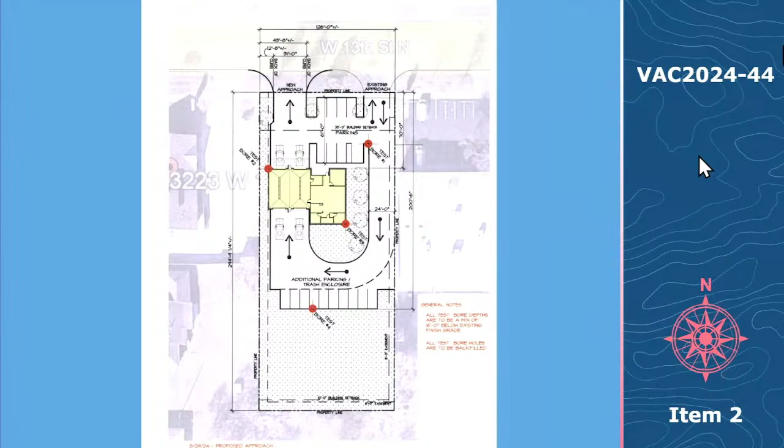I agree with the staff report, and of course, he said it a lot more eloquently than I can. Basically, what we are doing here is building an EMS post, and the additional drive that we're asking for is for egress only for the EMS vehicles that would be leaving the post for an emergency call. Thank you. Any questions to the applicant?

Agent? Thank you. Thank you. Is anyone else present wanting to speak on this item? Anybody want to speak on this item? Seeing none, I'll bring it back to commission. What's the pleasure of the board? Move to approve per staff comments.

Second. Got a motion by Mr. John William Bay, second by Mr. Aldridge. Any discussion? All in favor, say aye. Aye. Anybody opposed? 4-0. Item number 3, vacation case 2024-00045. Yes, once again, Brad Etherly, Senior Planner. Now we're discussing case vacation 2024-45.

In this case, the applicant is proposing to vacate the east 6 feet of the west 53.7 feet of the south 2.3 feet of the north 15 feet of Lot 42, Block A, Riverside 2nd Addition. If approved, this will reduce the platted setback to 12.7 feet. The property is addressed at 5505 South Emporia Avenue and is generally located within 2 blocks east of South Broadway Avenue and within 1/4 mile north of East 55th Street South.

If approved, the applicant intends to construct an egress window well. Wichita Public Works and Utilities, Wichita Fire, Wichita Traffic Engineering, and Wichita Stormwater do not object to the reduction in the setback. Neither do Cox, Evergy, or Black Hills Energy. The Riverside 2nd Addition was recorded on November 28th of 1977. Planning staff has listed the considerations associated with the request to vacate the described portion of the 15-foot platted building setback in the staff report. And with that, I can stand for any questions.

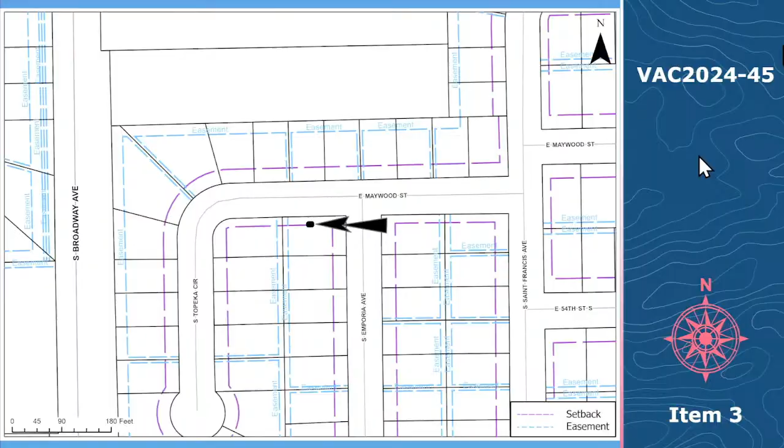Any questions of staff? Thank you. Applicant or agent? No, wait. How about advisory board members? Any comments? Rondi with Evergy, no additional comment. Getting ahead of myself. Applicant or agent?

My name is Les Munn, owner of 5505 South Emporia. I just want a bigger bedroom in the basement. And so I'm learning a whole lot of stuff about this today. And that's it. I just want to make sure I can get out of the basement. And that's basically it. So I can have a bigger bedroom. You agree with staff comments? Yes. Thank you. Any questions of the applicant?

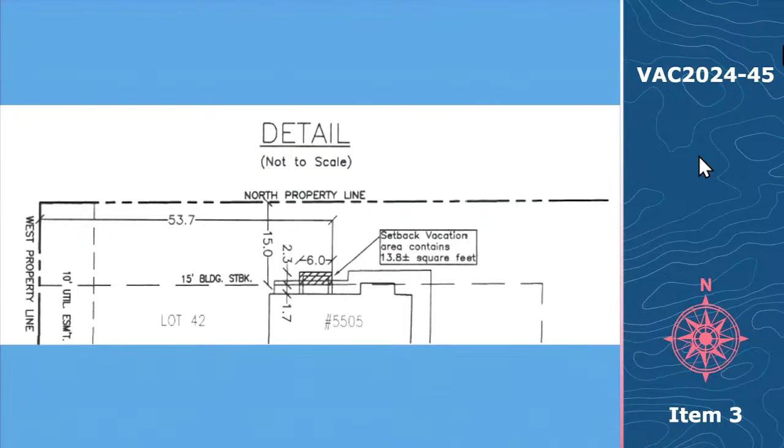Thank you, sir. Anybody else here would like to speak on this item? Seeing none, I'll bring it back to commission. What's the pleasure of the board? Motion to approve. Second. Got a motion and a second. Any discussion? All in favor, say aye. Aye. Anybody opposed? 4-0. Next case is vacation 2024-00047. Yes, once again, Brad Etherly, Senior Planner.

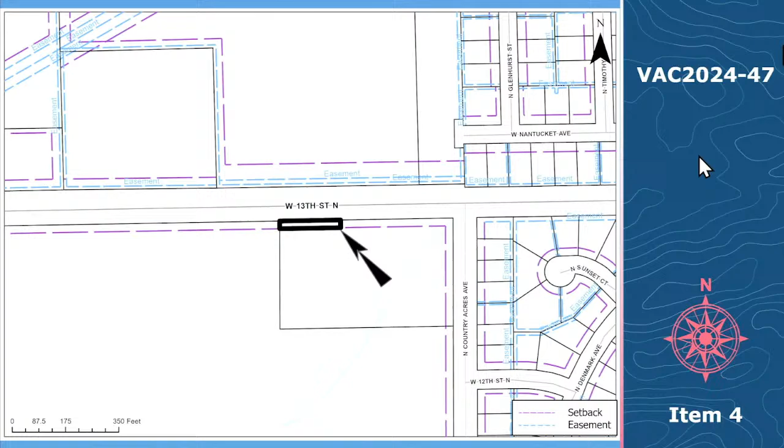We are moving on to case vacation 2024-00047. For this application, the applicant is requesting a vacation of a portion of platted complete access control to permit one drive onto West 13th Street North from a newly formed parcel split from Lot 1 Northwest High School Addition. The purpose of this new drive approach is to provide access to the proposed new Patrol West substation for the Wichita Police Department. The proposed drive would be limited to the western 200 feet of the parcel.

A zone change from SF5 to PUD, which is case PUD 2024-00017, to permit the proposed new police substation is being heard concurrently with this vacation request. An additional access point to the site is proposed to be off of North Country Acres Avenue, providing access to the proposed rear parking area of the police substation. The Northwest High School Addition plat restricts access to two openings along West 13th Street North. Northwest High School has two existing access points along West 13th Street North, which would not permit any additional drives along this section of West 13th Street North.

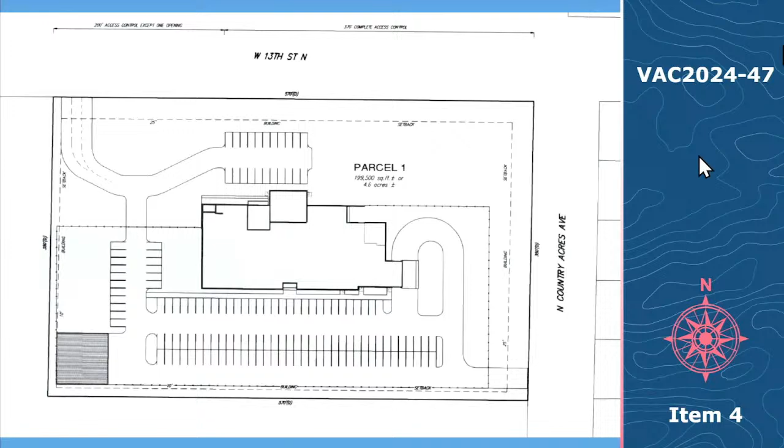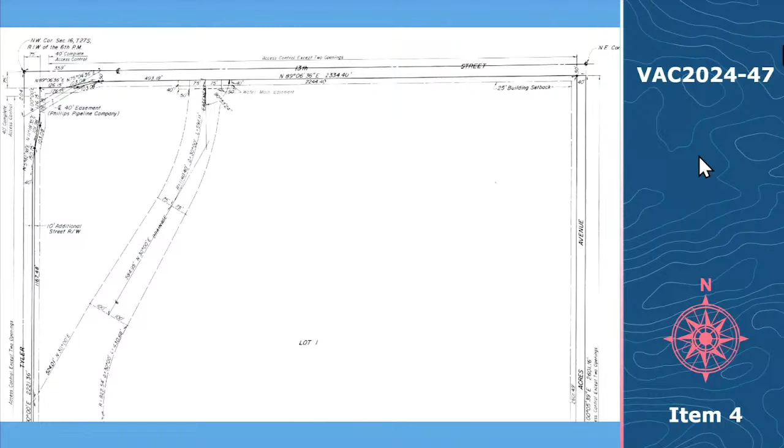The proposed new drive does not meet the City of Wichita's access management standards for driveways onto arterial streets. City access management standards require a minimum of 400 feet between full movement drives. The entire western 200 feet of this vacation area is within 340 feet of the center line of the nearest access drive. Therefore, any drive within the vacation area will not be 400 feet from that center line of any existing drive. However, the entire vacation area is over 400 feet from the center line of North Country Acres Avenue to the east, which does meet that access management standard.

There are no driveways across West 13th Street North at this location with which the proposed drive would be in conflict. Wichita Traffic and Engineering does not object to this request. Neither do Wichita Public Works and Utilities, as well as Cox and Evergy. Black Hills Energy does have a 2-inch line in the vacation area, but they do not object to the request. Any relocation of existing lines will need to be discussed and will be at the applicant's expense. The Northwest High School Addition was recorded April 14th of 77, and planning staff has listed considerations associated with the request to vacate the described portion of the platted complete access control in the staff report. And with that, I can stand for any questions.

Any questions of staff? Advisory board members, any comments? Rondi with Evergy, no additional comment. Applicant or agent?

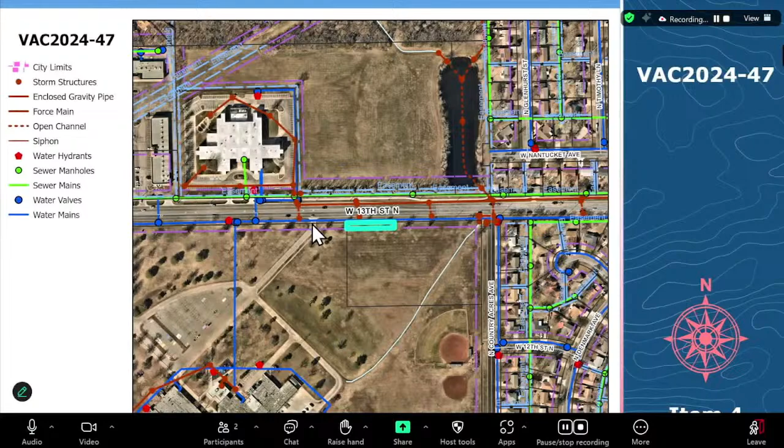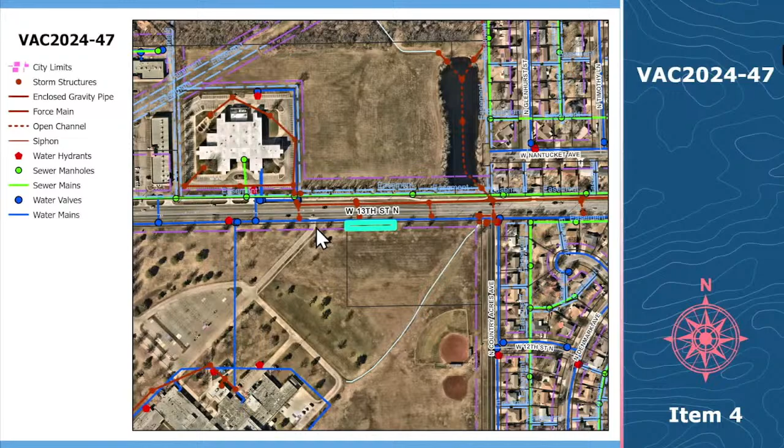Jay Cook, Baughman Company, agent on behalf of the applicant, 315 South Ellis. If you'll go back to that last slide. We're requesting this to allow for an entrance into the West Patrol that will be built. We're working with the city on this. And in that last slide, this entrance that's close is an exit only from the school, so we don't feel that that's got the same weight of a full left-right. It's an exit only instead of an exit and entrance. And if you have any questions, I'll take them.

Any questions of the agent? Seeing none, thank you. Anyone else here to speak on this item? Bring it back to board. What's the pleasure of the board? Motion to approve per staff comments and recommendations. Second. Got a motion to approve, second. Any discussion? All in favor, say aye. Aye. Anybody opposed? I'd like all these access controls lifted, but I guess that's for the city and the county.

Number 5, vacation case 2024-00048. Yes, once again, Brad Etherly, MAPD. Now we're moving on to vacation 2024-00048. The applicant is requesting the vacation of the plattor's text to amend the ownership and maintenance of Reserves A and B, Summit Crossing Second Addition. The subject site is located on the west side of North 127th Street East and within 1/4 mile south of East 21st Street North.

Reserve A is a stormwater detention pond located west of Lot 1, Block B in the subject addition. Reserve B is located on the north side of East Shady Brook Street between the right-of-way and Lot 1, Block A of the subject addition. If approved, the ownership and maintenance of Reserve A would transfer from the Lot Owners Association to the owner of Lot 1, Block B, and the ownership and maintenance of Reserve B would transfer from the Lot Owners Association to the owner of Lot 1, Block A.

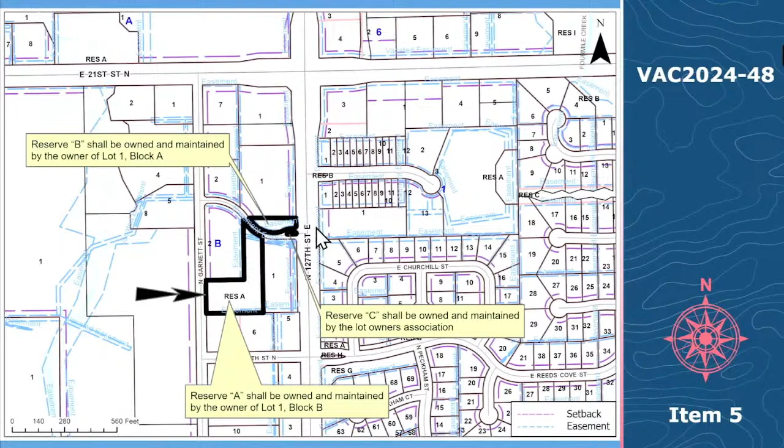The Summit Crossing Second Addition was recorded August 1st of 2017. Planning staff has listed considerations associated with the request to vacate the plattor's text of platted reserves in the staff report. And with that, I can stand for any questions. Any questions of staff? Seeing none, thank you. Mr. Advisory Chairman, board members, any comments? Rondi with Evergy, no additional comment.

Mr. Chairman? Yes. We did have a question for Brad. Is ownership and maintenance going to be transferred from A to A? If you look down in, let's see, where you're describing the considerations under number 1, it says Reserve A from the Lot Owners Association to the owner of Lot 1, Block B. Is it going to go?

Abby, that might have just been a typo. Is that just a typo? Okay, we just wanted to make sure. We can review the consideration and make any necessary amendment to it prior to MAPC to make sure that that condition matches what the ownership should be. Sorry, Brad is pinch hitting for me and reviewing these. I just wanted to make sure it was correct for the record, that's all. Thank you. Sorry I didn't see your hand. Any other comments from advisory board members? Applicant or agent?

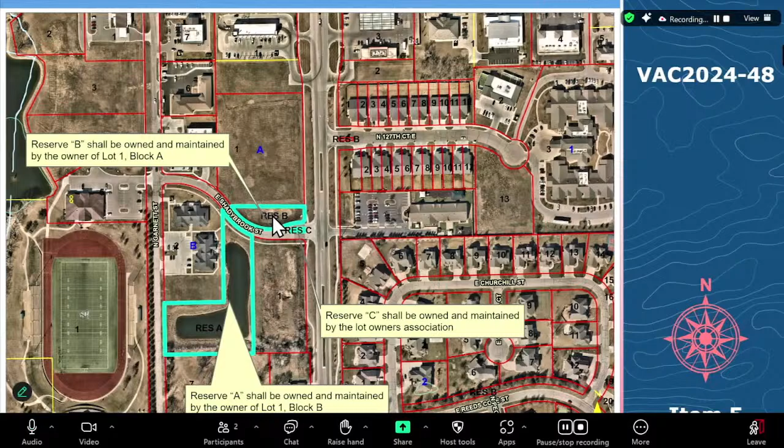Jay Cook again, Baughman Company, agent on behalf of the applicant, 315 South Ellis. If you go back to that last slide, maybe I can clear up the answer. The owner of Lot 1, Block A owns Reserve B. So that ownership goes with that, and this ownership is tied in with this lot right here. So all we're wanting to do is to change the plattor's text to put the onus of maintenance onto these. And as Brad eloquently put, the reserves will stay the same. It's just the ownership and who's maintaining that land. So if you have any questions, I'd be happy to answer.

Mr. Aldridge? Yes, sir. Okay, just to clarify, you're representing both applicants? Yes. And both applicants are good with this? Yes. Okay, thank you. Any other questions of the agent? Thank you. Anybody else present wanting to speak on this item? Anybody else? Bring it back to commission. What's the pleasure of the board?

Motion to approve per staff recommendations and comments. Second. Got a motion to approve and second. Any discussion? All in favor, say aye. Anybody opposed? 4-0. Next item is item number 6, vacation case 2024-00049. Yes, once again, Brad Etherly, MAPD.

This case is for vacation 2024-00049. In this request, the applicant proposes to vacate a portion of the platted 30-foot street side setback along West Davis Drive on lots 3, 4, and 5 of Block A, Walker Davis Addition. If approved, this will reduce the platted setback to 10 feet.

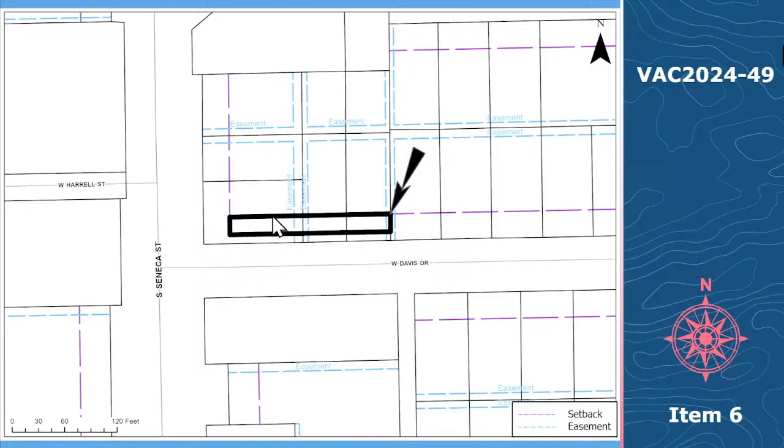The property is addressed 4720 South Seneca Street and is generally located on the east side of South Seneca Street and 1 block north of West 47th Street South. The purpose of this vacation is to create room for a receiving dock, a trash enclosure, and an overhead canopy toward the rear east side of the building. Concurrently, the applicant has a zone change application being considered to rezone the property from LC to PUD.

The applicant is proposing to repurpose the existing commercial structure into an inventory processing center for Goodwill retail locations elsewhere. Inventory would be received at this location, packaged and processed, and then shipped to those Goodwill retail locations. This proposed use creates the need for a receiving dock to be constructed on the south side of the building. Vacation request is required because rezoning a property to PUD cannot reduce platted setbacks.

If the subject setback was not platted, the zoning street side setback in the LC district would be 10 feet. The requested reduction matches this zoning street side setback. The LC zoned property directly south of the subject site on the south side of West Davis Drive was platted in the same addition, but was not platted with the street side setback along West Davis Drive. The property owner of said property would be allowed to construct a building 10 feet from the property line that

abuts West Davis Drive. Wichita Public Works and Utilities, Wichita Fire, Wichita Traffic Engineering, and Wichita Stormwater do not object to the reduction in setback. Neither do Cox, Evergy, and Black Hills Energy. Although Evergy and Cox have overhead lines on poles along the east side of Lot 5 that cross the subject setback, so the applicant should contact Evergy regarding clearance standards from the overhead lines and what they intend to construct at that time. The Walker Davis Addition was recorded on January 23rd, 1952.

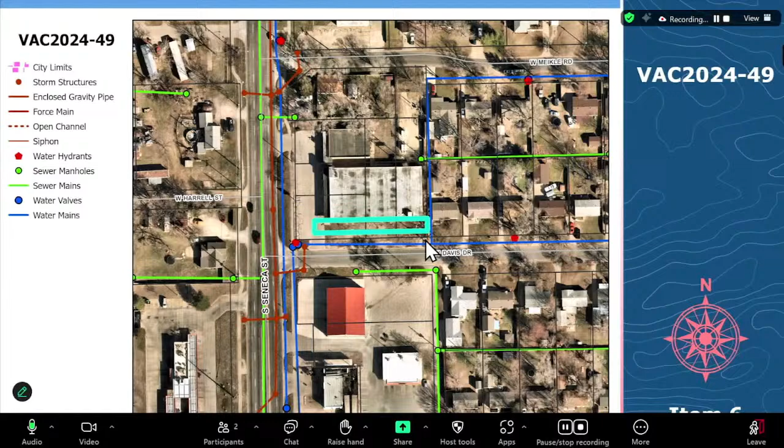It would be coming off the pole that's right there at the southeast corner of the property line. Located in the street right of way? The pole should be, yes. Okay, we'll have to check for that. And then there are utility lines that do run north through the easement along the side of the building.

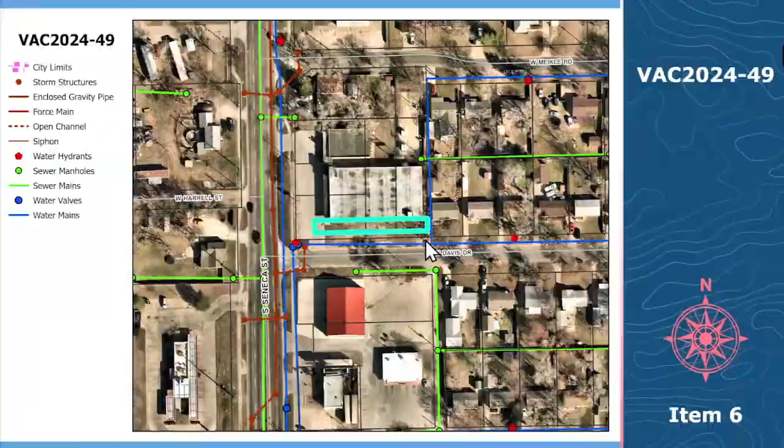Is there not a line that comes across the street? Because when I looked at Google Earth, it looked like there was a line that runs across the street from that pole. I'm looking at Google Earth right now. It looks like there's a line that crosses the street as well. But it does not cross the setback? There is a line that does run west from that pole as well. It's hard to tell if it crosses the setback or not, just from the angle of the street view.

The lines on that pole, Philip, looking at that, can you verify, don't they run east and west and then one going to the south, but nothing to the north towards the building? No, there are lines that go north towards the building. Okay. Yeah. There's one line that goes south, and then there's one line that runs diagonal from the pole in question to the southwest to a pole at the southeast corner of Seneca and Davis.

So what we can do is ensure that we're clearing arc distances on the new canopy that's being built. I believe the existing building is not tall enough that you've got an arc distance safety issue with your current poles, but we can certainly check that and coordinate with you. Okay, you just need to check with Sammy and make sure that it meets proper clearance, as well as that we have room to maintain those lines to get a bucket in there for maintenance. So, you know, we need to maintain a line that fails. Okay.

So, I have a quick question. Yes, sir. Either for you or for Evergy. So right now, the only utilities that you have in there are overhead. There's nothing underground. There's no J boxes in there. Everything over there is overhead. It's overhead area. Okay, thank you. At least that affects that.

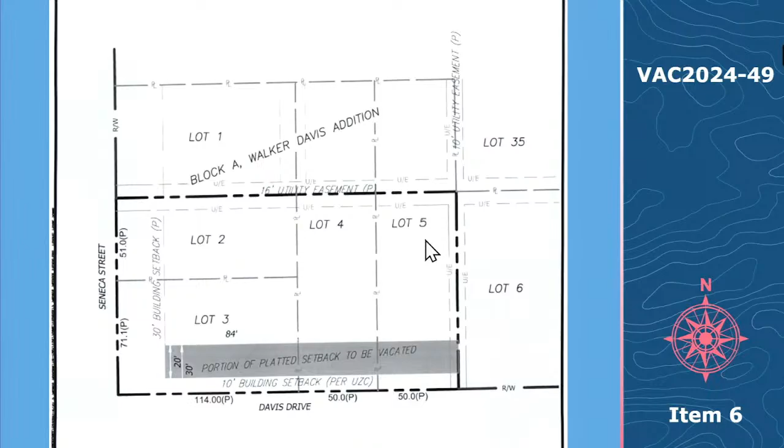Really, I'd like to stress that this vacation case for the setback along Davis is so that we can provide for that overhead coverage in a receiving dock to ensure safety, not just of the employees, but also for a fenced enclosure for trash to provide a little bit more safety for the neighborhood, keep things from being tucked in around the corners and nooks and crannies in the area.

I got a question of staff. Basically, since not sure what's going on, they will have to obtain a building permit to do this canopy and truck dock. So if they can't get something worked out with Evergy, they won't get a permit.

I think that's an interesting question. If I'm reading the plat correctly, there is a platted 5-foot utility easement on the east side of the property line. That's the only easement Evergy or anyone else has. So in this case, they're not asking to vacate the easement, they're asking to vacate the setback. Evergy has asked for a little more space. I think the one thing that might be done is, if the will of the board is to do so, is to grant the request except for the east 10 feet.

However, and legal staff can correct me if I'm wrong, that doesn't necessarily give Evergy the right to use that additional 5 feet as an easement, because it's not a platted easement. And apparently there's not a private easement there either. So does that make sense? Does that answer the question? I mean, the basic answer is, yeah, they have to get permits, and if they don't have everything they need for permits, they theoretically wouldn't get one.

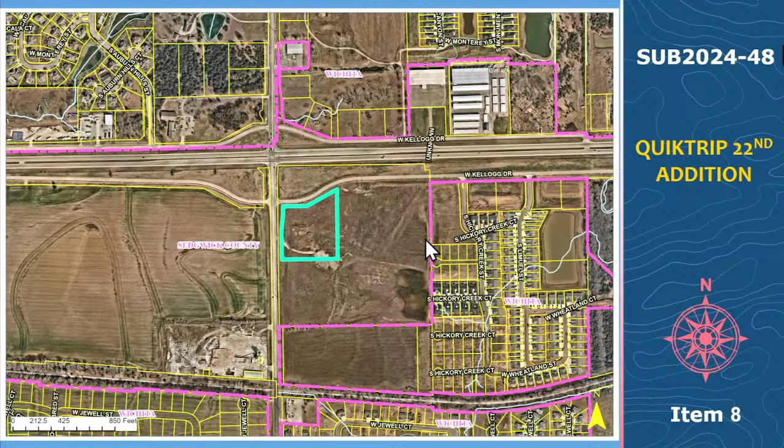Please provide a presentation of the staff report for John Williams Bay. Okay. If you could go to the subdivision 2448 slide, please. This is subdivision 2448, QuikTrip 22nd Addition. This is a one-lot commercial subdivision located within the county. However, the applicant states that an application will be submitted for annexation into the city. And there was a zone change from SF20 single-family residential to GC general commercial that will be presented.

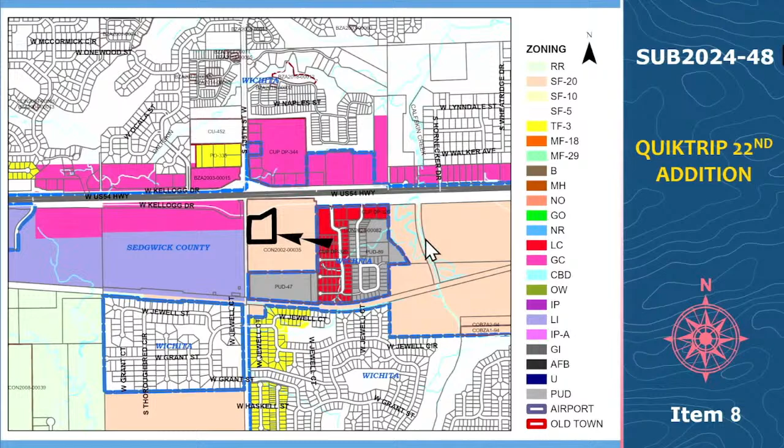If you could go to the next screen, please, to the final plat. And this is the preliminary plat. Next screen, please. This final plat. Complete access control is indicated along 135th Street West with a 170-foot right turn only movement opening, and complete access control along West Kellogg Drive with a 170-foot right turn full movement opening. There are no waivers requested by the applicant. I will go through staff comments. Item A, Public Works Utilities advises water is available. Sanitary sewer will have to be extended.

Item B, drainage plans submitted on 9/16/24 and approved on 9/18/24. Item C, standard city fire comment regarding hydrant and apparatus roads. Item D, County Public Works requires street name change in the owner certificate and vicinity map be corrected, and access controls are approved per revised final plat received on September 19th, and the plats submitted for you have addressed the corrected street names and vicinity map.

Item E, environmental health standard comment regarding irrigation wells. Item F, planning signature needs revised. That has been revised on the plat submitted on the screen. County surveying had comments regarding instrument number notations. Those have been corrected per what is presented on the screen. And item H, Evergy comments, we have discussed that they have approved and worked out the issues with the easements. So I will stand for questions.

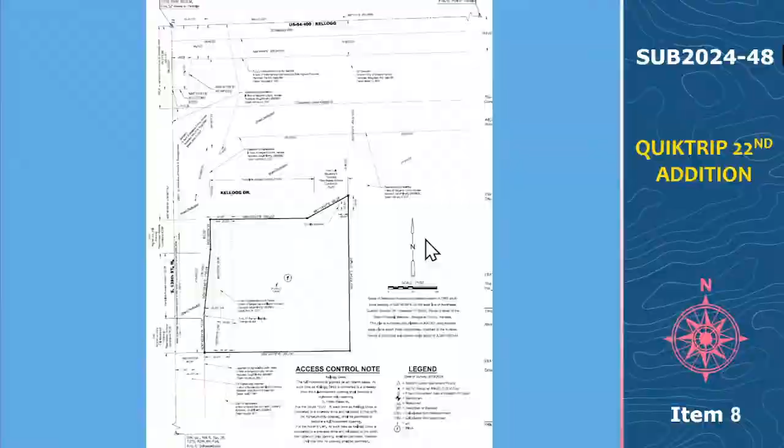Any questions from commission? Thank you. Any other comments from the advisory board members? No additional comment? Applicant or agent? Brian Lindeback, MKEC Engineering, 411 North Webb Road, on behalf of the owner and applicants. No additional comment. We're in agreement with staff. Thank you. Any questions of the agent? Seeing none, anybody else want to speak on this item? Seeing none, I'll bring it back to board. What's the pleasure of the board?

Motion to approve per staff recommendations and comments. Second. Got a motion to approve and a second. Any discussion? All in favor, say aye. Aye. Anybody opposed? Passes 4-0. Item number 9. Greg Sharon, planning. Sorry, go ahead. Subdivision 2024-00050.

Morning, Greg Sharon, planning staff, here to present Subdivision 2450. This is Oak Tree. Next screen, please. This is located in the county and within 3 miles of the city of Wichita, and associated with zone change 2441, a request from SF20 single family to TF3 two-family residential, and the applicant has requested annexation into the city of Wichita. Next screen, please.

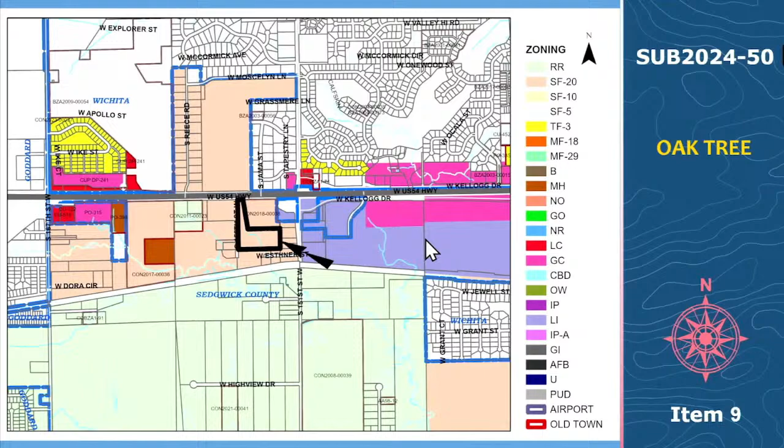This is the preliminary plat as you see on the screen. Waivers. The applicant requests a waiver for lot depth-to-width ratio for lot 5, block 4. Subdivision regulations state that the maximum depth on all residential lots shall not exceed 2.5 times the width. I'll go through staff comments.

Item A, city public works and utilities require sanitary sewer be extended to all blocks. This is within rural water district number 4, and if applicable, will need to connect to rural water district number 4. The site appears to be served by Goddard Water. If the site is served by Wichita Water and it currently has a Goddard Water meter, then the applicant will need to coordinate with Goddard Public Works to kill any existing water services.

A 30-foot utility easement is requested. Some changes to the plat's text regarding utility easement. Public Works requests a utility plan and some revisions to the plat's text for reserve. Item B, County Stormwater Management has approved the drainage concept. Item C, drainage plan concept was submitted on 10/24, and that has been approved for city stormwater management. Item D, standard county fire department comment regarding service drives. Item E, standard comment from city fire regarding hydrant locations and apparatus roads.

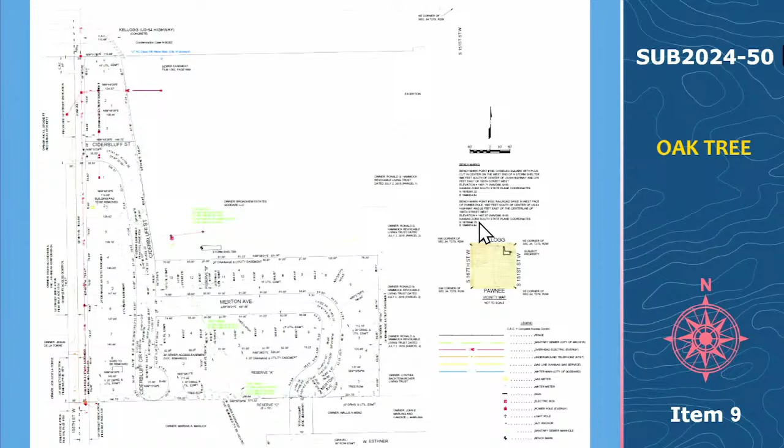And that comment is there's an existing primary electric line running through this plat and it will need to be relocated to refeed. Heidi Bryan, representative, is working with the agent for this applicant on this and will be the contact for this plat. And I will stand for questions. Any questions, Mr. Aldridge?

Is this in Goddard's area of influence? No, it's not within their area of influence, but it's my understanding, according to Public Works, that they can hook up to their water supply. Just wondering why their water line is even out there if it's not part of their influence. Yeah. And were they looking at trying to annex this at one point? Yeah, I'm just curious on that. Yep, I don't know, but the agent will be able to say if they tried to request annexation into Goddard or what.

Well, like you said, Greg, they have submitted an annexation request into Wichita. Yes, into Wichita, that's right. I believe the water well's on 119th for Goddard. But I think there's an agreement between Goddard and City of Wichita. Any other questions, agent or staff? Thank you. Advisory board members, any comments?

Rondi with Evergy, we have two lines running through here. One is going to be removed. It's an abandoned line and there will be no cost to the agent or to the applicant. And then we have another line that's feeding other properties that we're going to be relocating and or removing, I believe. And I know that Heidi's been in discussion already with the agent about this. And so we had to add those comments later. We've also received a revised plat with the easements marked. I think the easement was on the original plat but wasn't marked. So we don't need additional easements. We just marked streetlights for the city to sign off on when it's annexed.

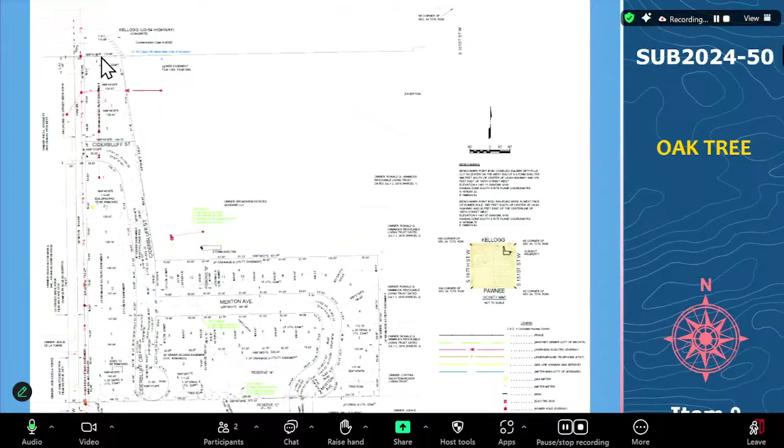Yeah, that's a good point. But I think that needs to be cleared up. And again, I think KDOT needs to weigh in, mostly on the left turn movements coming off of Kellogg and what impact that would have. Would that involve just an additional street right-of-way dedication from our side to accommodate the left turn lane? Or is there something different that you have in mind?

I think the left turn lane would be on Kellogg for the westbound traffic. I think it's always going to be 2-lane on 151st. I don't think there'd be another right or a left turn lane on 151st. But so 151st, I think we just need to get that right-of-way situation figured out. And maybe that's prescriptive, but I think it needs to be documented, whatever it is.

Right, I was just thinking if we don't need to dedicate any additional street right-of-way on our side, and then that's just part of the plan process that, yes, it includes the left turn, or no, it doesn't, whatever's determined later, I would hope that that meant we could still proceed with the preliminary plat, that wouldn't cause any variance on the layout itself at this point.

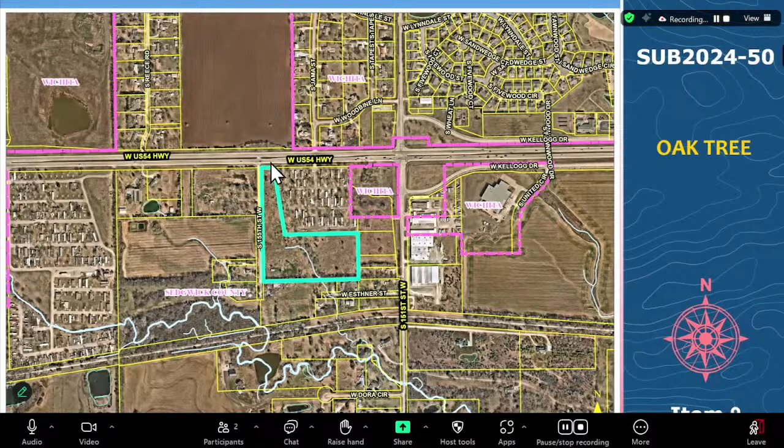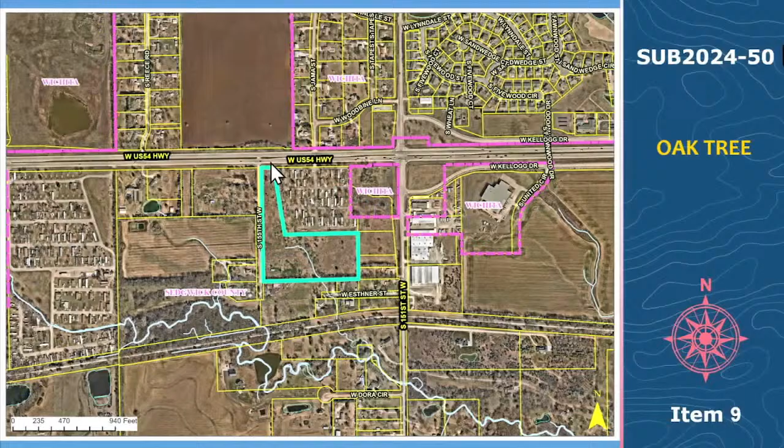I'd have to probably get with Trish. I want to make sure I know about prescriptive easements. I've never gone through the process of following through on that. But we would want to make sure that that road could be built to a public standard and that it really would ensure public access through there and that it couldn't be restricted by that property owner for any purpose. And I don't know what that document is. I don't know if that's a legal document, if it's a right-of-way document. I don't know how we get there.

So to answer Commissioner Aldrich's question, yes, we could proceed if it's the will of the board to approve it subject to KDOT's approval, or you could also defer it and take into consideration County Public Works concerns and try to work this out. Daniel, do you know how long it usually takes KDOT to respond? Or do you have any connections that can expedite a response from them?

Yeah, the person I need to talk to is David Seitz, and he's been made aware of the project, but I haven't seen any comments yet. So I don't know how long that'll take. And I think if it's a matter of they need a traffic study done, that might take a little bit of time. I don't think that will be done in a day. So you don't think that if we approve this and then the full planning commission looks at it next week, you wouldn't have an answer on it yet?

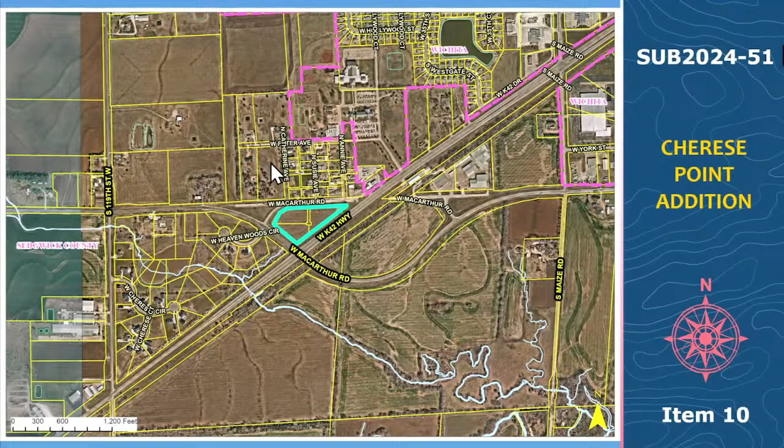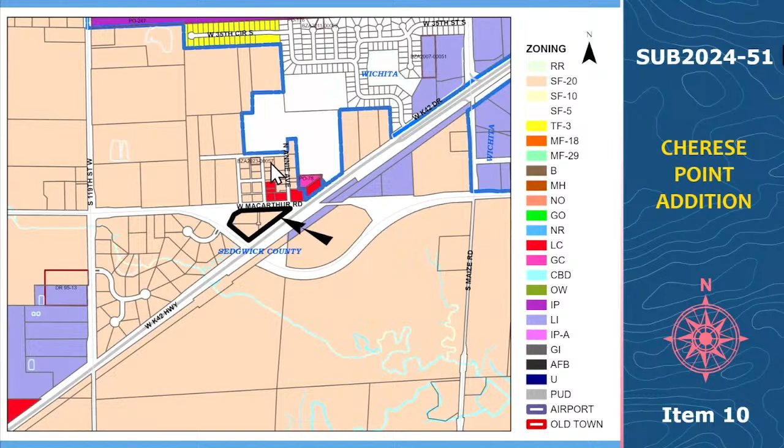So this is a preliminary plat for a 15-lot residential subdivision. It's located in the county and within 3 miles of the city. The applicant will request a zone change from SF20 to TF3 two-family. The applicant states that they are proposing annexation into the city of Wichita. Next screen, please. And then the next screen. This is the preliminary plat on the screen that you see in front of you.

Access controls are shown with a 58-foot opening to access 14 of the lots along West Cherese Court off of West MacArthur Road, and a 130-foot opening to access Lot 15 off West MacArthur via a separate private access drive. There are no waivers requested by the applicant. Go through staff comments.

Item A, Public Works Utilities requires water to be extended to lots 1 through 14 and lots 1 through 15 for sanitary sewer. Existing specials will be spread on a square-foot basis, absence of a respread agreement. Request a 20-foot easement, revisions to platter's text regarding drainage and utility easements.

Item B, County Stormwater Management received a drainage concept on 10/10/24. Item C, City Stormwater Management concept was submitted on 10/10/24 and approved on 10/10/24. Item D, County Fire request service drive code. Service drives meet code, and they request a 75-foot radius for the cul-de-sac. The City Fire Department standard comment regarding hydrant location and apparatus roads.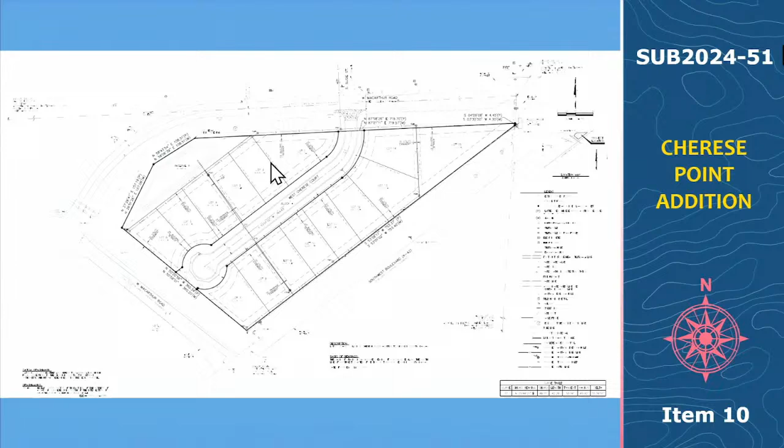Regarding item B on county stormwater management, you said that they received the drainage concept, but you didn't say whether or not it was approved. I have not heard back from them. I don't know if Daniel knows anything about that, whether they've actually approved. I'll try to get you an update before the end of this, but I'm pretty confident that if city has reviewed it and approved it, that will likely be okay, but I'll look into it fast.

Advisory board members? Rondi with Evergy, 4025 North Tobin. A correction, we do not have street lighting on this plat. It is a county plat, so therefore it won't have any street lighting on it. The applicant or developer will have to put that in privately if they choose to. And then the only thing we have is additional easements. Thank you. Applicant or agent?

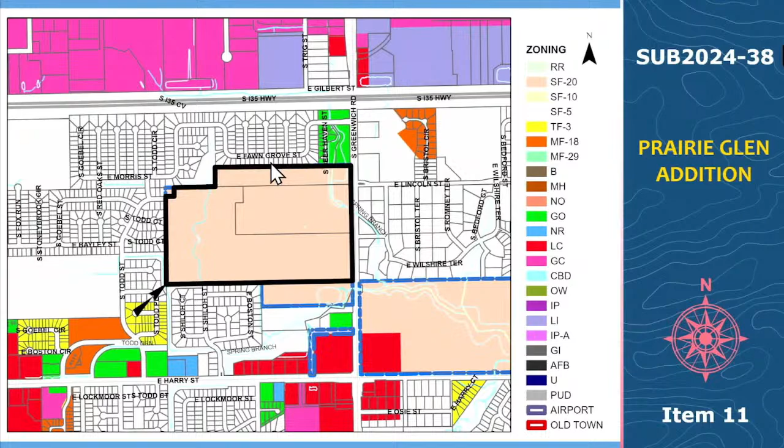And next screen. So complete access controls are indicated with one opening shown along South Greenwich Road. Street connections to existing platted subdivisions have been provided to the north, east, and south, as seen on the subdivision plat. Go through waivers. There are 4 waivers that will be needed. The first waiver is for lot widths of less than 90 feet. Second waiver is to allow Deer Haven Circle lengths to exceed 800 feet and to provide no emergency access easement.

Third waiver needed, lot depth to width ratio of several lots within the subdivision. And the fourth waiver is to allow no street stub to the unplatted property to the south of this parcel. On the east side of the parcel, there is a single family residential in the county, so no street connection has been provided to that single family residential use. I'll go through staff comments.

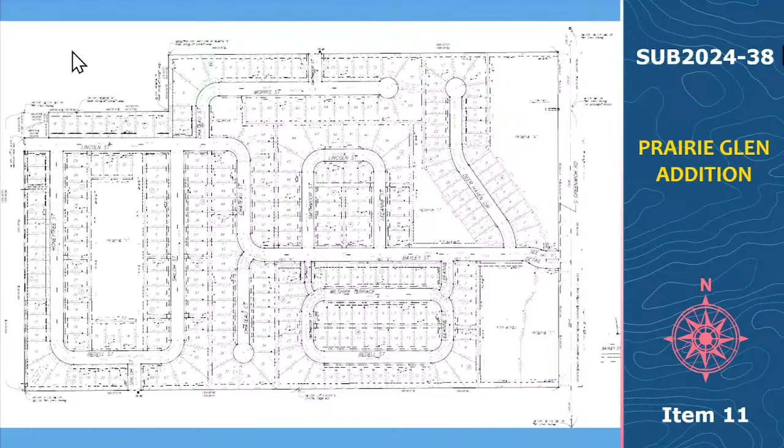This is Daniel with Sedgwick County Public Works. Going back to the drainage plan, we did have some comments on there. Ultimately, the reason why Sedgwick County comments on city plats is because drainage affects properties downstream in the unincorporated parts of the county. And so that's what Scott was looking at. He provided a number of comments.

The one that I think is probably most pertinent is our stormwater engineer indicates that the channel protection volume was not included on this plat. And I believe that's required per our shared Wichita and Sedgwick County Stormwater Manual. And so hopefully Scott and the city can confirm that the channel protection volume is on there.

I don't know how we came to different conclusions on that. But maybe that's something that could be looked at before this is heard at MAPC. But it is a requirement that channel protection volume be included.

Until annexation actually occurs, this is still within the county's jurisdiction, so County Public Works has a right to comment, and their comments should be considered. I believe that it has already been annexed, so it hasn't. I thought I've been told that it's already been approved, but maybe not published. I don't know.

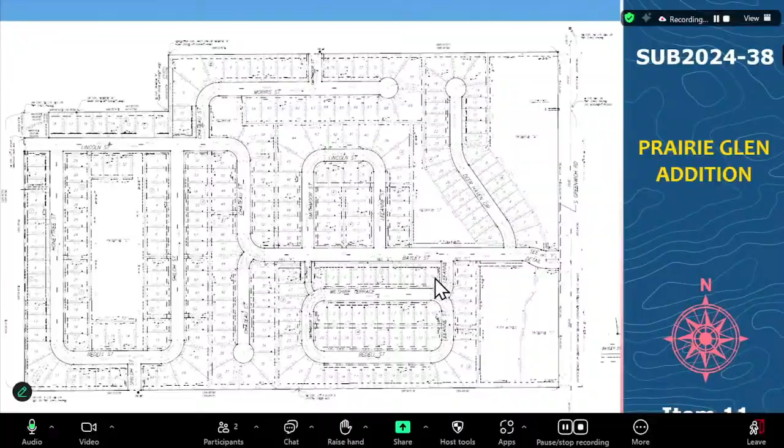Yep, I can hear you. Got a report. So you got the plat. I did notice on Reserve E and D over there, there's 2 easements that Kevin asked to cross. Yes. I didn't see those here. Yeah, they're really tiny. He came into our office and we discussed it and he pointed out those. So yeah, we will get those on there.

And then on the west line, that 5-foot transmission easement where the line's not going anywhere. Yes. Your 15-foot drainage is on the east of that, and then across the property line in Harrison Park is where that other is, correct? We have a 15 that would go over the top of the 5-foot Evergy easement in case we need to do any kind of grading through there, which we would have to get approved by Evergy. Right, with your plans. And then there's another additional easement on the west side of this property that was granted with the other plat. Okay, thank you.

This is Chris with Wichita Public Works. I just wanted to add on to Matt's comment that the comment for the 30-foot drainage and utility easement along the existing tree rows was made before we had received the utility plan. So that comment was made to help protect anything that might be put in there. But with what Chris had said, and with the utility plan that we had received, it sounds like it might work out. We might have a spot or two that we might need to work with Chris on, but it sounds reasonable.

Anything else? Thank you. Anybody else present want to speak on this item? Seeing none, I'll bring it back to commission. What's the pleasure of the board? Mr. Chair, I make a motion to approve the plat as given based on staff comments and other comments that we've had here, and to work things out with county stormwater regarding the channel protection. I think that's something that needs to be definitely looked at. And also including in the motion, approval of all 4 of the waivers.